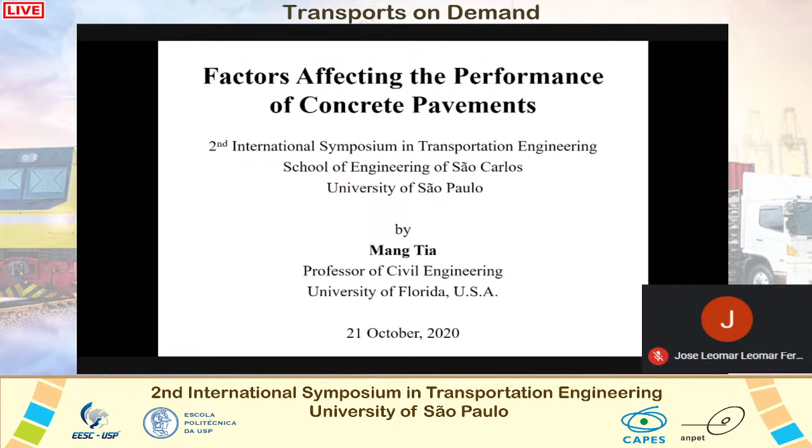Yes. Yeah, thank you very much, Professor Leomar Fernandez. Thank you for inviting me to speak at this prestigious School of Engineering of São Carlos of the University of Sao Paulo. It is indeed a great honor for me to do that. I have not visited your school, but I hope that in the near future, I will have a chance to visit your great School of São Carlos in person.

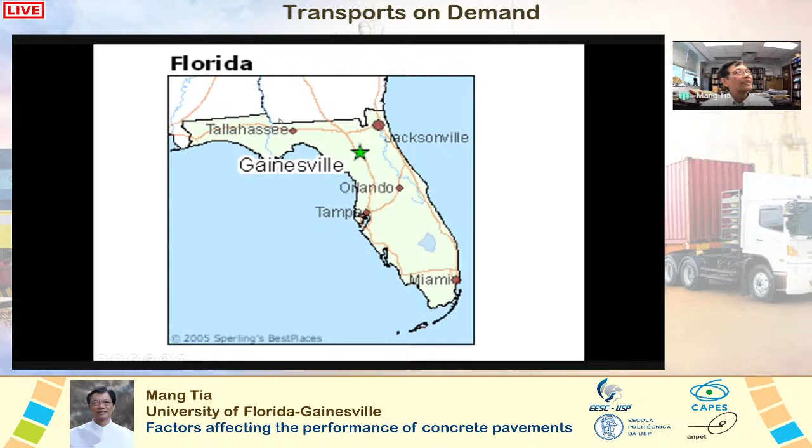I am speaking from the University of Florida, USA. This map shows the location of Florida in the United States. University of Florida is located in Gainesville. This map shows the location of Gainesville, which is marked with a green star in the map here. And on this map, you can also see the location of some famous cities in Florida, including Orlando. That's where you go to Disney World if you come to visit Orlando. There's Tampa, Miami, Jacksonville, and this is our state capital, Tallahassee.

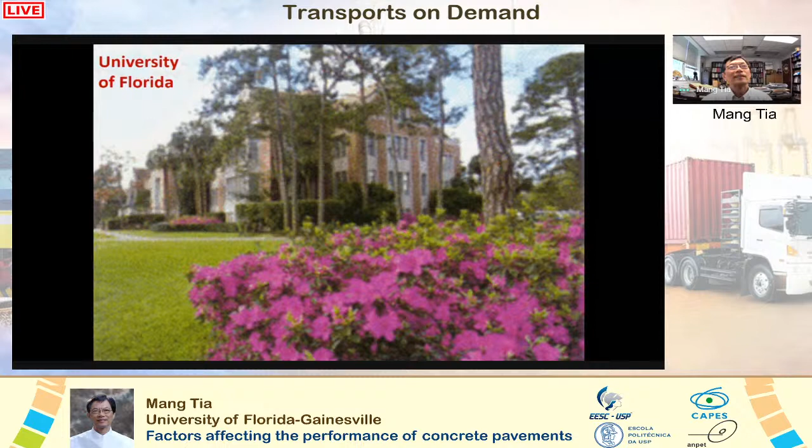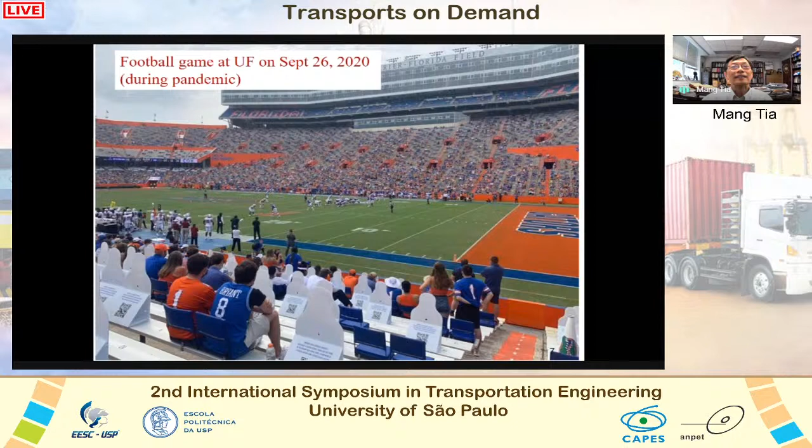Well, recently, about 20 people from the UF football team, including the coach, tested positive for COVID-19, and the football game was canceled last weekend, and it has been suspended indefinitely for now, unfortunately. Well, I'm here to talk about concrete pavements, not football.

Here's a famous concrete pavement in Florida, in northern Florida. It's known as Interstate 10. Interstate 10 is about 4,000 kilometers long, and it starts from the Pacific West Coast in California and runs all the way east to the East Coast in Florida. In Florida, this I-10 section is about 600 kilometers long, and it runs from the Alabama state border on the western end, through the state capital, Tallahassee, and ends at Jacksonville on the east side.

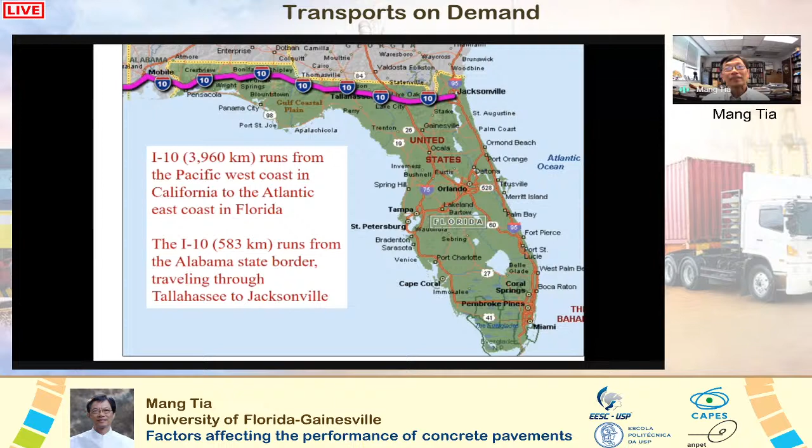And there's also lobbying from the asphalt industry people to build it with asphalt. But finally, a compromise was reached. The western half, from Alabama to Tallahassee, would be built with asphalt, and the eastern half, from Tallahassee to Jacksonville, would be built with concrete. Okay.

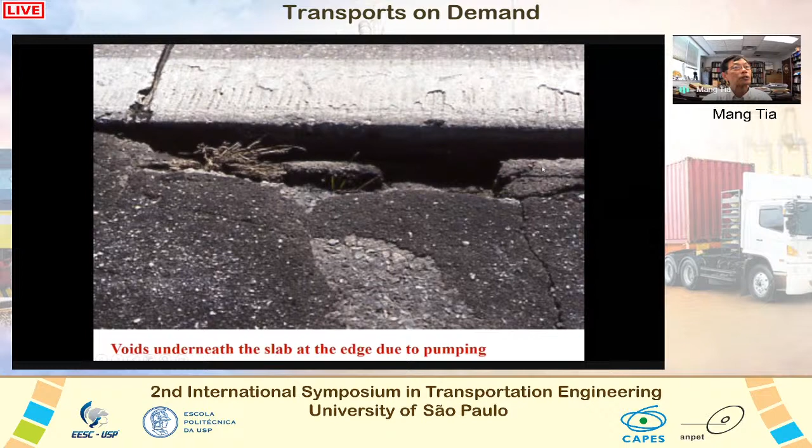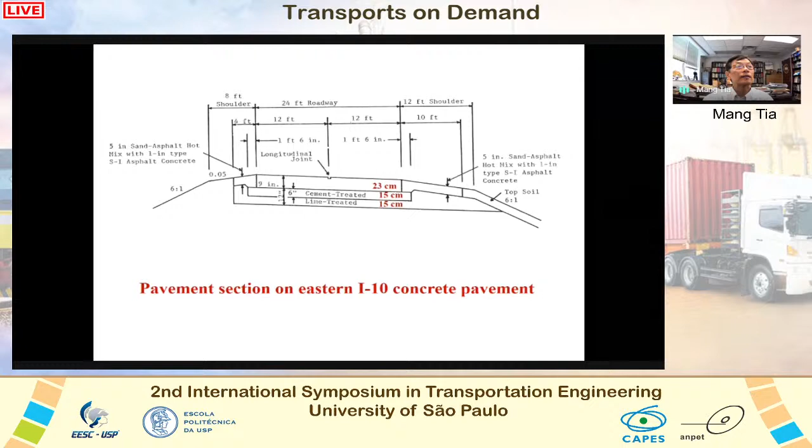Well, because of this observed failure, some modifications were made to the design of the rest of the pavement which had not been constructed. So instead of using 30 centimeter of stabilized subgrade, in the modified design, it's replaced with 15 centimeters of cement treated subbase over 15 centimeter of lime treated subbase. The idea behind this modified design was that this would make the foundation stronger and the subbase would be less erodible. However, this made the situation even worse.

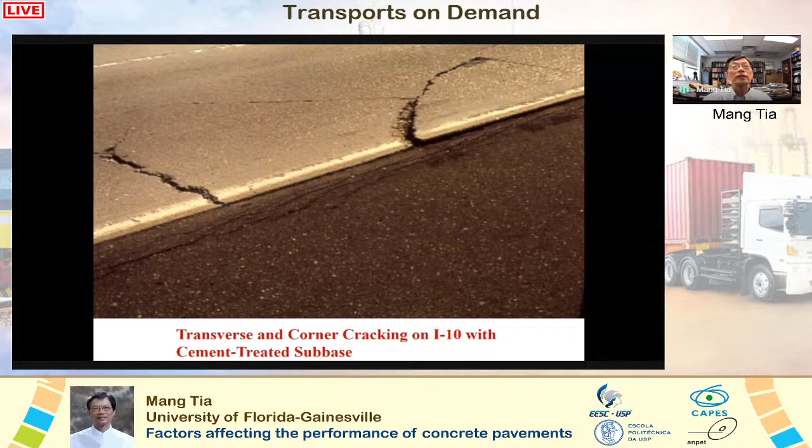There was even more cracking on this pavement with a stronger subbase, as you can see from this picture. The use of the more impervious cement treated subbase had actually worsened the drainage condition of the pavement and thus aggravated the pumping problem even more, as you can see from this picture.

Well, several years later, in 1980, there was construction of another concrete pavement on this I-75, which runs north and south through Florida. Okay, and it goes south all the way to Miami. There was a construction of a 46-kilometer, 6-lane concrete pavement in the county of Sarasota and Manatee, which is south of the city of Tampa, as shown in this map.

Well, because of the problems they have seen on the I-10 concrete pavement, a new design was adopted for this pavement. An even stronger base was used for the concrete slab. The base used was a 15 centimeter Econocrete, as shown here in this drawing. The shoulder lane was also constructed with Econocrete, as shown here. Econocrete is concrete with relatively lower strength than normal concrete, but it's much stronger than the cement-treated subbase.

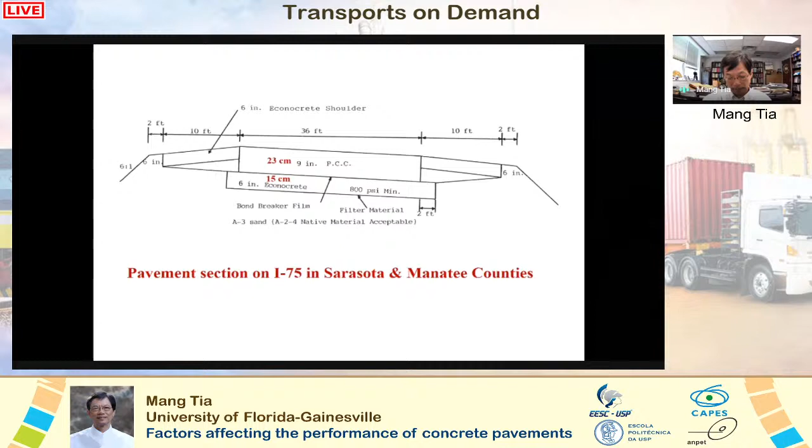It also used an innovative design of skew joints. Skew joints are joints that are not at right angle to the longitudinal direction. And it also used variable joint spacing. The slabs are of different lengths, and spacings of 16, 17, 22, and 23 feet are used. Okay, this corresponds to 4.9, 5.2, 6.7, and 7.0 meters.

The rationale behind the use of skew joint was that when trucks' wheels pass over the joints, only one wheel would pass over the joint at one time, and thus the impact effect would be lessened. And the rationale behind the use of variable joint spacing was that this would lessen the resonance effect. If the slabs are of different lengths, if they were to vibrate, they would vibrate at different frequencies, and thus the chance of all the slabs vibrating at the same resonance frequency would not happen.

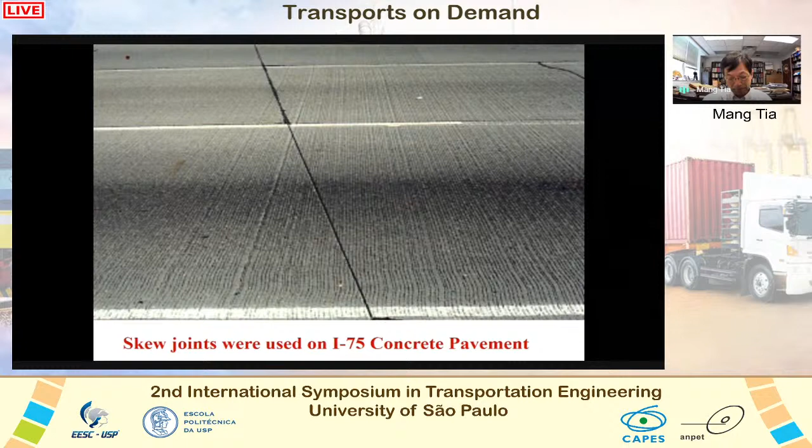The Econocrete shoulders were tied to the concrete slabs with tie bars, and it was indeed what we can call a Cadillac design. Cadillac is a very expensive car, so this is an expensive design. It was a Cadillac design which should never fail. And it was like the Titanic ship, which should never sink. But just like the Titanic sank, this pavement failed miserably.

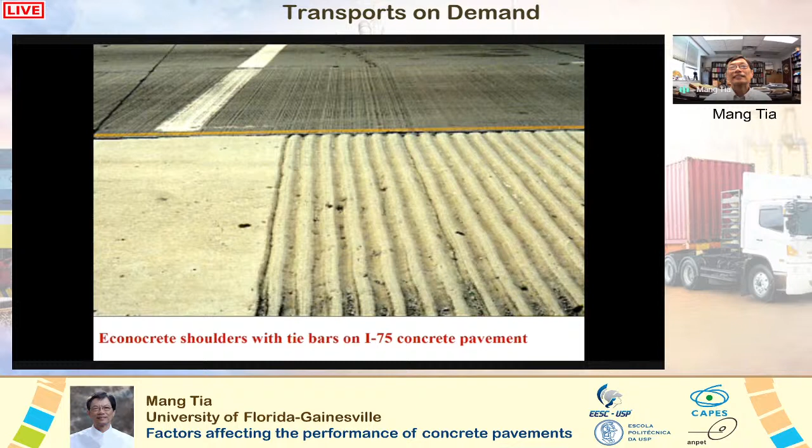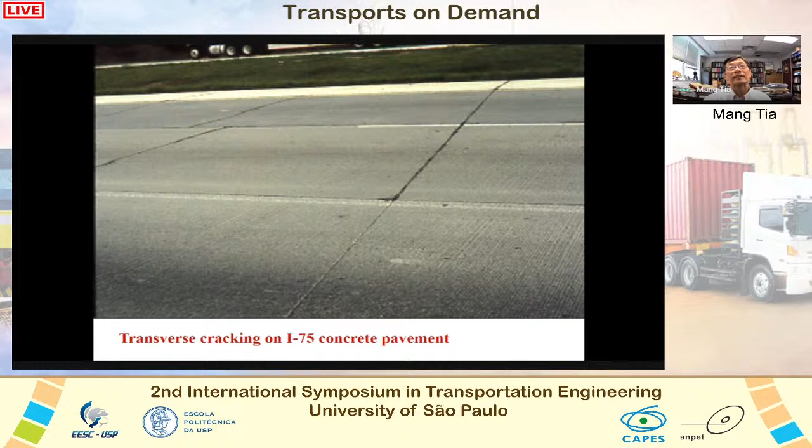Soon after the highway was opened to traffic, transverse cracking was observed, especially on the longer slabs. Later on, when structural analysis was performed to evaluate the effects of skew joint, it was found that the use of skew joint didn't really help. It actually increased the maximum stresses due to the acute angles of the slabs at their corners. And also pumping was observed from the supposedly non-erodible Econocrete base.

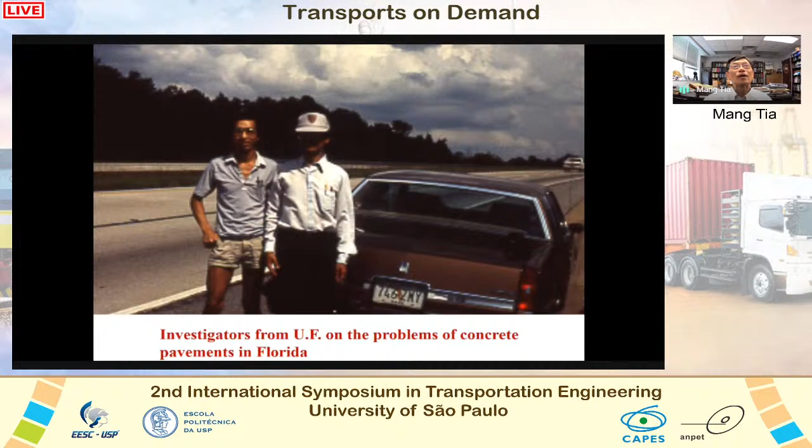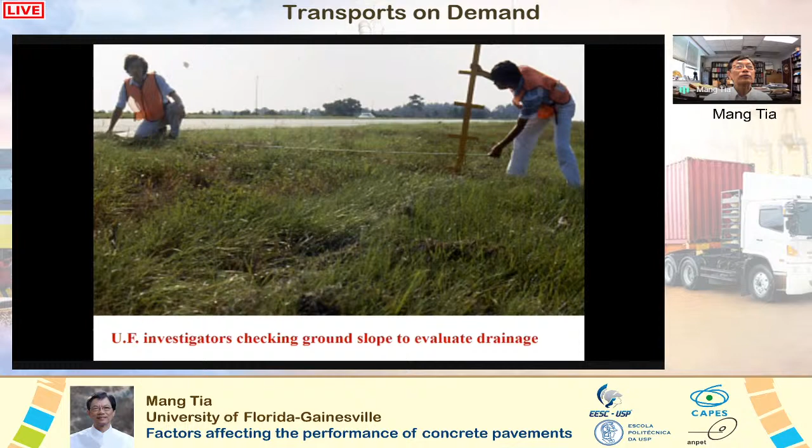We as university researchers had the opportunity to investigate the problems of these pavements. And I was the person wearing a white cap here in this picture. So we worked together with the engineers from the Florida Department of Transportation to investigate the causes of problems, checking for dowel bars with metal detector, checking ground slope to evaluate drainage condition of the pavements, performing falling weight deflectometer tests to evaluate the response of the pavement under various conditions. Thermocouples were used to monitor temperature variations within the concrete slabs.

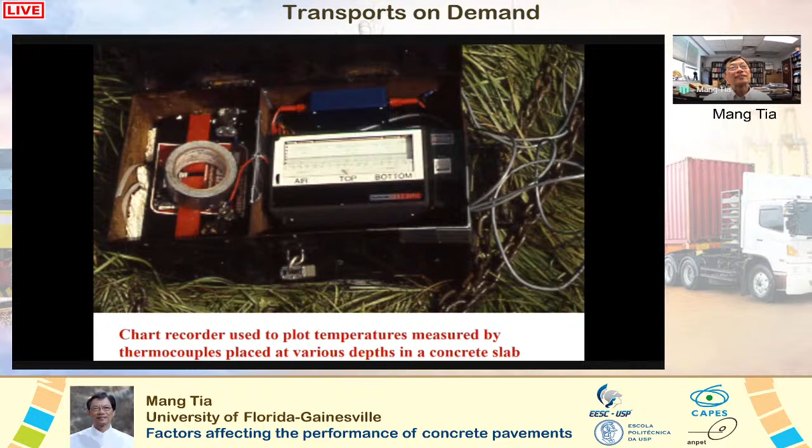In those days, a chart recorder was used to record and plot temperatures measured by thermocouples, which were placed at various depths in the concrete slabs. These are a few typical temperature distributions in a concrete slab at different times in the daytime. In the daytime, the temperature of the concrete was higher at the top than at the bottom, as you can see from these plots.

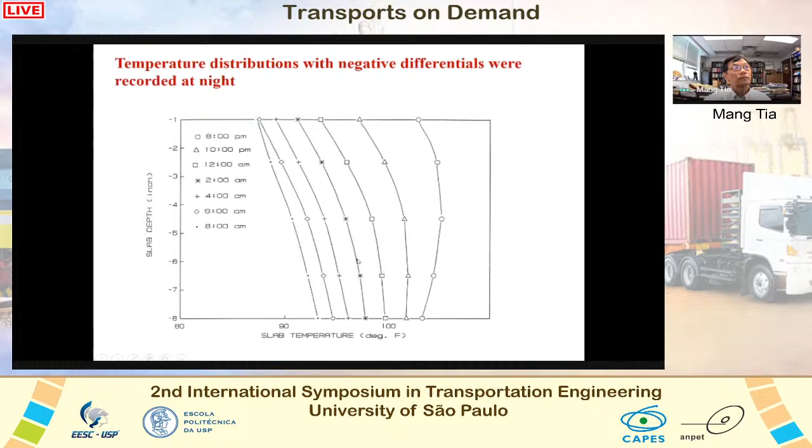At night, it's the other way around. At night, the temperature is lower at the top than at the bottom. And this shows temperature distributions at different times at night.

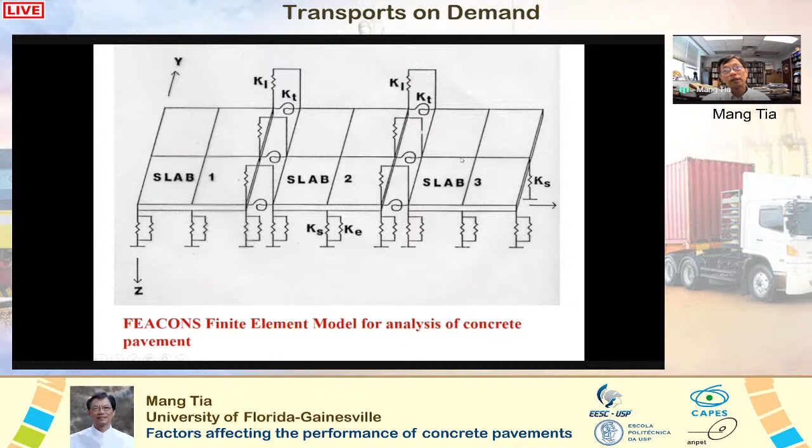To help with our evaluation, we developed a finite element model called FEACONS for analysis of concrete pavement under the combined effects of loads and temperature differentials in the concrete slab. It also had the capability to model the effects of joints and edges, and also model the behavior of concrete slabs, which is either bonded or not bonded to the base layer. So with this finite element model, we are able to do a lot of analysis.

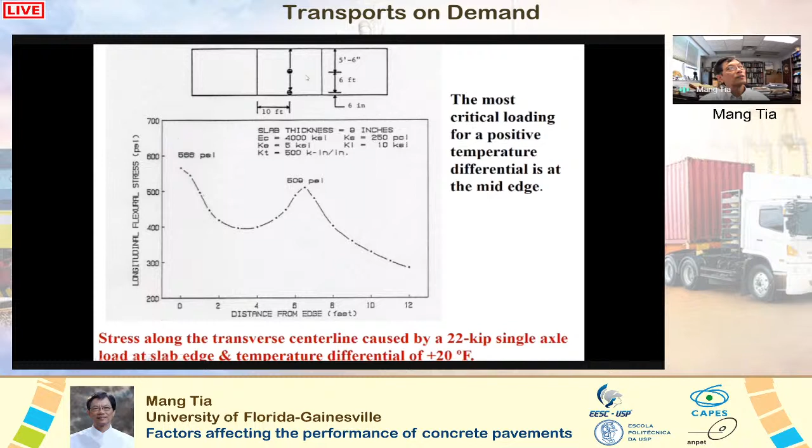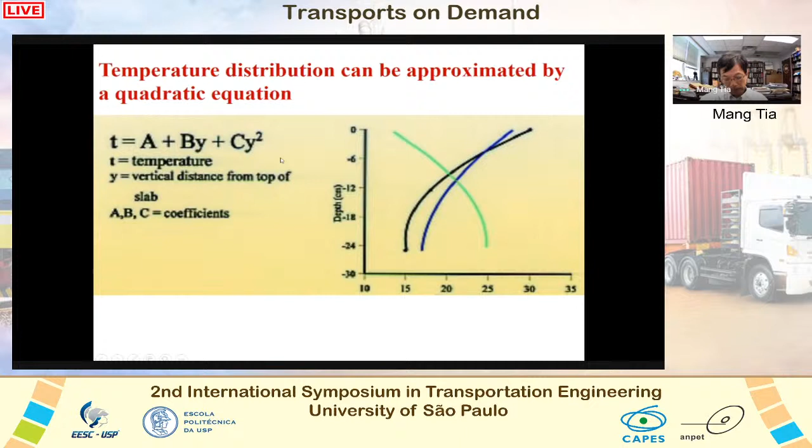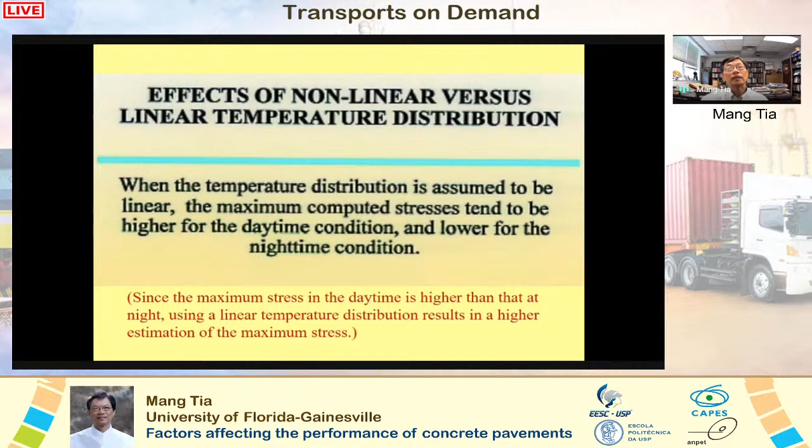Well, when the temperature distribution is assumed to be linear, the calculated maximum stress tends to be higher for the daytime condition and lower for the nighttime condition. The maximum stress in the daytime condition is usually higher than that at night. And thus, if we use a linear temperature distribution, we will get a higher estimation, which is a more conservative estimation of the maximum stresses. So it's okay to use a linear approximation, because in that way we'll get a more conservative estimate of the maximum stress.

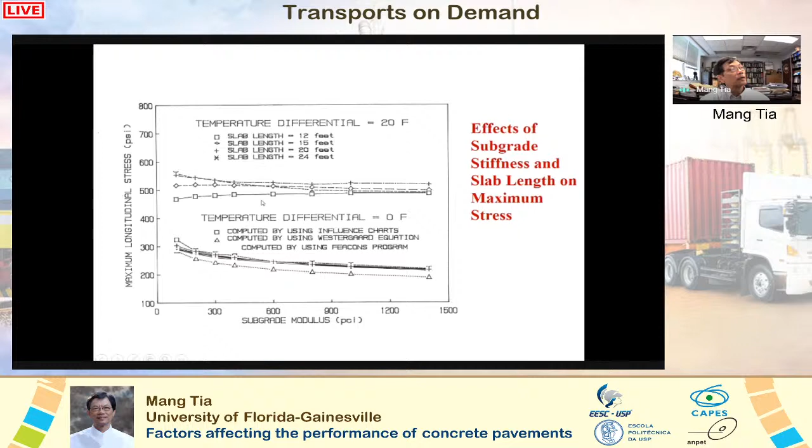But when temperature differential is considered, the stresses are much higher, but also the subgrade stiffness has less of an effect if temperature differential is considered in the analysis.

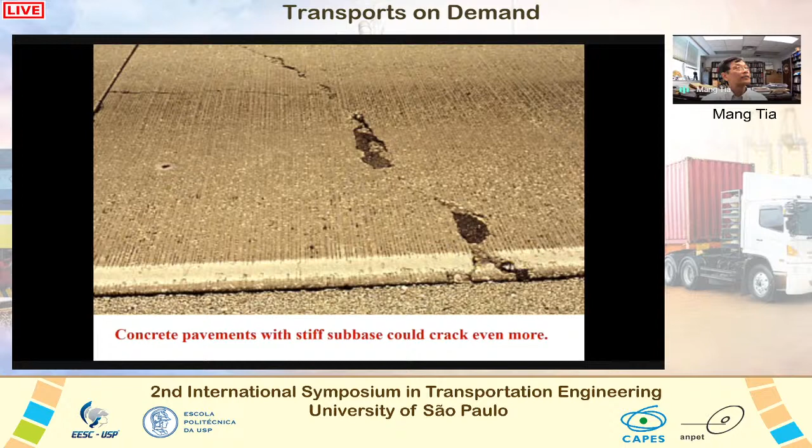So using a stiff subbase would not help in reducing cracking in the pavement slabs. Here's an example of a cracked slab on a pavement with a stiff subbase. And concrete pavement with stiff subbase could crack even more, as we have seen from our observation.

So we can summarize by saying that when the effects of thermal gradients are considered, the effects of subgrade stiffness has very little effect on the maximum stresses in the concrete slab. The use of a stiff subgrade or subbase may not necessarily improve the performance of a concrete pavement.

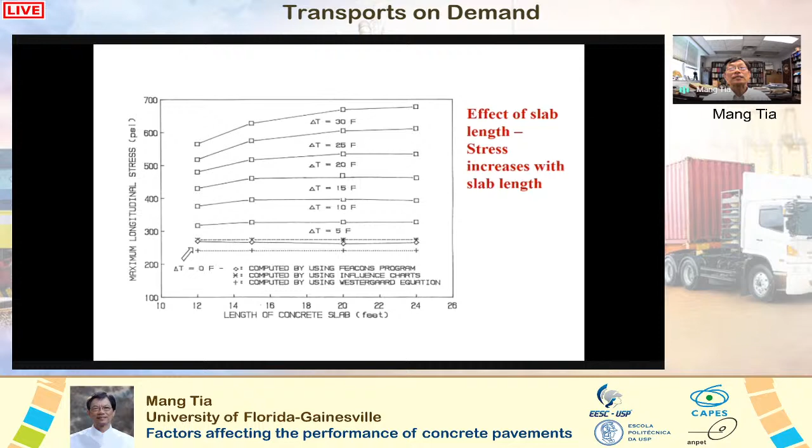When temperature differential in a concrete slab is not considered in the stress analysis, slab length has no effect on the maximum stresses. However, when there is a temperature differential in the concrete slab, the slab length could have significant effect on the maximum stresses. These are plots of maximum stress in a concrete pavement as a function of slab length for different temperature differentials. As you can see from these plots, when there is a temperature differential in the concrete slab, the maximum stress increases as the slab length increases.

Thus, we can summarize by saying that when thermal gradients exist in a concrete slab, the maximum stresses increase with increasing slab length. And this conclusion was validated by our observation of cracking in the concrete pavement on I-75 in Sarasota and Manatee counties. The slabs of longer lengths of 6.7 meter and 7.0 meter cracked more than the shorter slabs of lengths of 4.9 and 5.2 meter.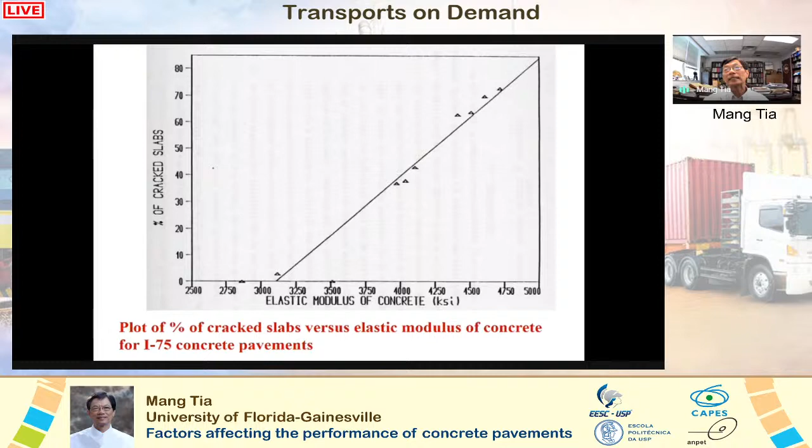The maximum stress is affected by the elastic modulus of the concrete, as shown in the previous slide, and the data obtained from I-75 concrete pavement in Sarasota and Manatee counties show that the concrete with higher elastic modulus show higher percent of cracked slab. These are data from our field observation. When we plotted elastic modulus of the concrete versus the percent cracked slab, it shows that the concrete with higher elastic modulus actually cracked more.

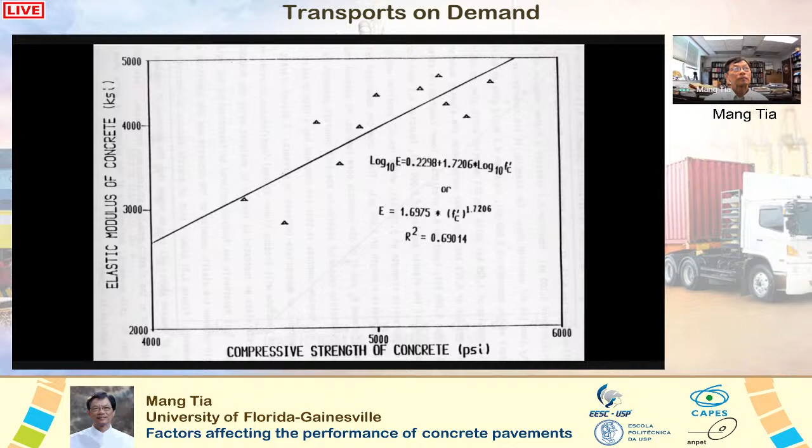Usually, concrete with higher strength is accompanied by higher elastic modulus, as shown in this plot of elastic modulus versus compressive strength of concrete. Thus, using a stronger concrete may not necessarily give us better performance, as the performance of the concrete pavement is also affected by the elastic modulus and coefficient of thermal expansion of the concrete as well. We can say that maximum temperature load induced stresses increase as the concrete modulus and coefficient of thermal expansion increase.

To evaluate the potential performance of a concrete pavement, we can compare the maximum stress with the flexural strength of the concrete. A concrete giving a lower maximum stress to flexural strength ratio would be less likely to crack and would give a better performance.

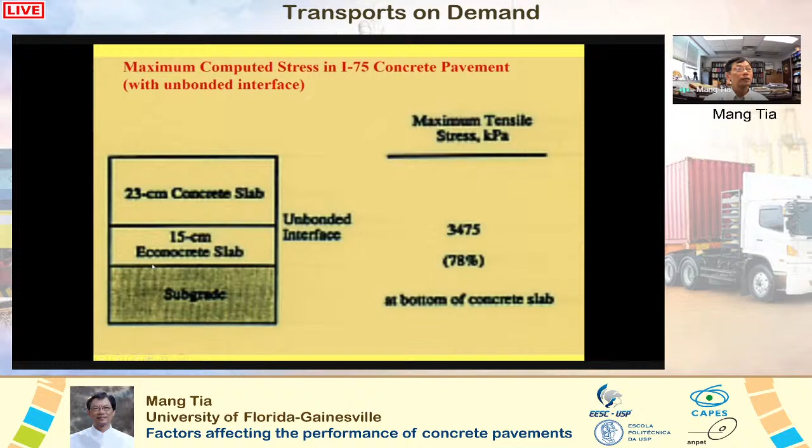The design of the I-75 concrete pavement in Sarasota and Manatee counties is shown on the left here. It had 23 centimeter of concrete over 15 centimeter of Econocrete base, and there was no bonding between the concrete and the Econocrete base. Critical stress analysis using a 22 kip axle load and a temperature differential of plus 20 degree Fahrenheit in the concrete slab gave a maximum stress at the bottom of the concrete slab, and the stress was equal to about 78% of the flexural strength of the concrete.

If the concrete slab were bonded to the Econocrete layer, the concrete and the Econocrete layer would act as one thick slab, and under the same load and temperature differential, the computed maximum stress would occur at the bottom of the Econocrete layer, and that maximum stress would be equal to only 67% of the flexural strength of the Econocrete. Unfortunately, the concrete slab was not bonded to the Econocrete base in that concrete pavement. If they had been bonded together, this pavement could have much better performance according to our prediction.

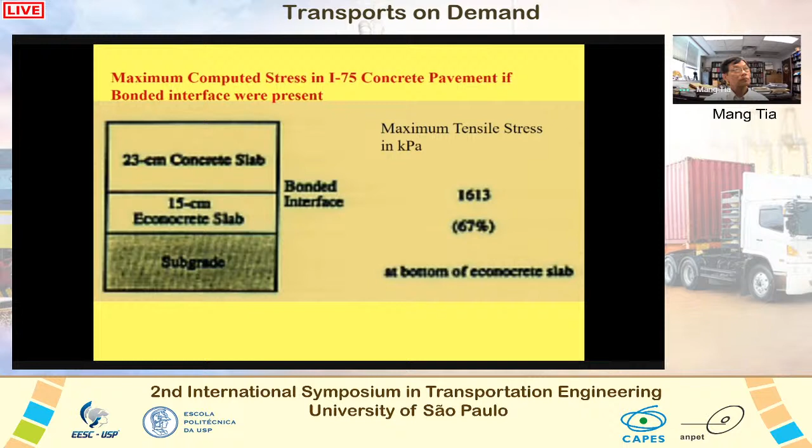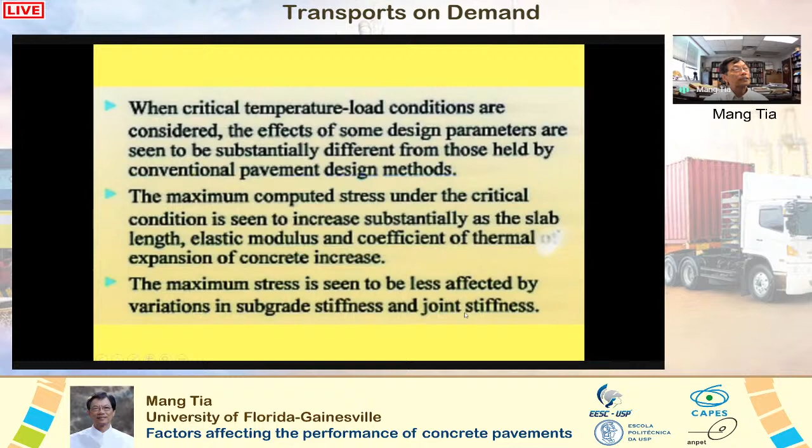We can make the following summarizing statements from our study. When critical temperature load conditions are considered, the effects of some design parameters are seen to be substantially different from those held by conventional pavement design methods. The maximum computed stress under the critical condition is seen to increase substantially as the slab length, elastic modulus, and coefficient of thermal expansion of concrete increase. The maximum stress is seen to be less affected by variation in subgrade stiffness and joint stiffness. A composite pavement with a bonded interface is seen to have a much lower maximum stress than that with an unbonded interface.

Using a wider slab that extends some distance into the shoulder lane can reduce the maximum stress in the slab substantially. Using a thicker slab is the most effective way to reduce the maximum stress. And as most people already know, good subdrainage is essential to ensure good pavement performance.

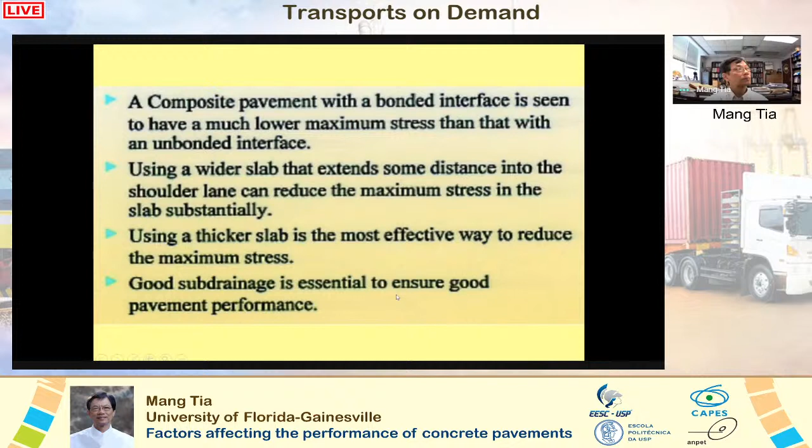This is a typical design used by the more recently built concrete pavements in Florida. It has a thick concrete slab with a thickness of 33 centimeters. The concrete extends 2 feet, which is equal to 61 centimeters, into the shoulder lane in order to reduce the maximum stress on the concrete slab.

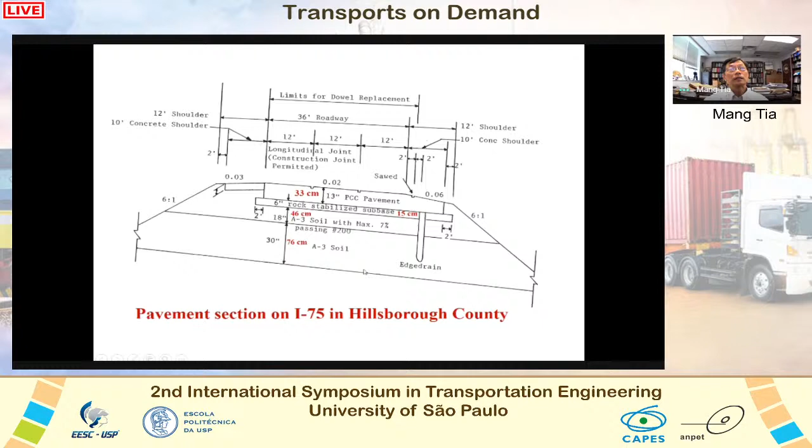The new design uses sub-base materials which have good drainage characteristics. The new design also incorporates edge drains from here to drain off the water which may get under the concrete slab. Okay, and so from all the lessons we've learned, the design used now is much better.

Next, I want to share the result of a recent study on the evaluation of concrete pavement life expectancies in Florida. First, a little bit on the background and objective of this study. In Florida, the initial design for new construction for both asphalt and concrete pavements is 20 years, while the rehabilitation period of asphalt varies from 8 to 20 years. That of concrete pavements varies from 20 to 25 years.

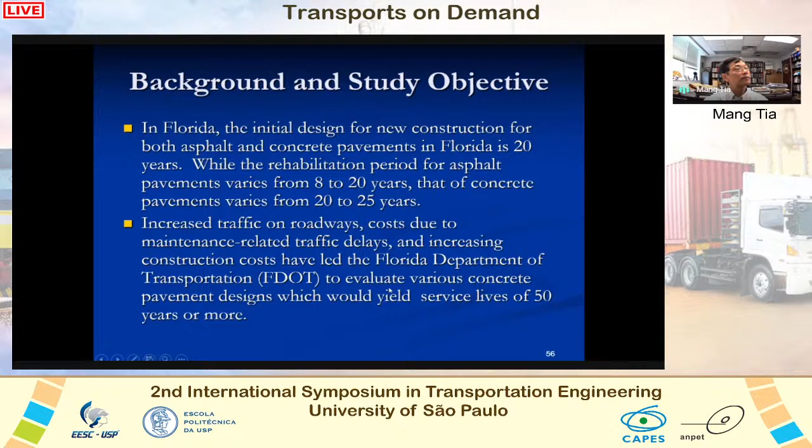Increased traffic on roadways, costs due to maintenance-related traffic delays and increasing construction costs have led the Florida Department of Transportation to evaluate various concrete pavement designs which would yield service lives of 50 years or more. And I would like to present 4 of the main tasks in this study. I won't read them as I will present them one by one as we go along.

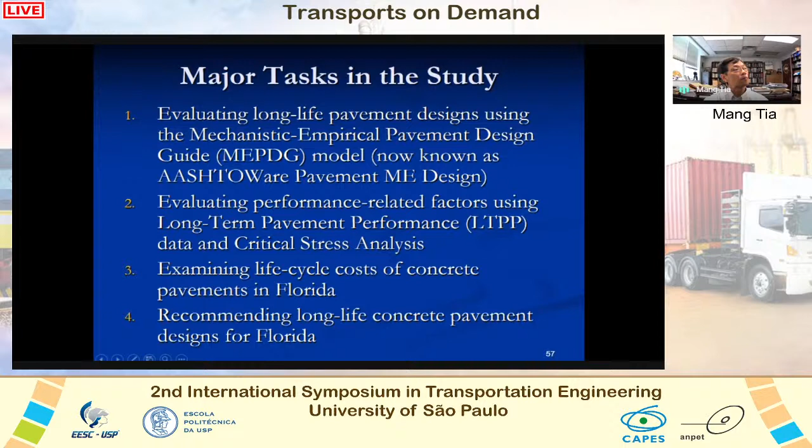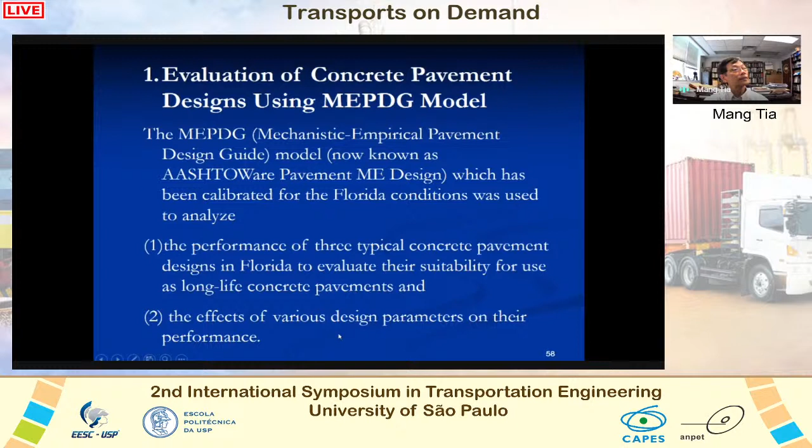In the first main task, the MEPDG, which is the Mechanistic Empirical Pavement Design Guide model, now known as the AASHTOWare Pavement ME Design, had been calibrated for the Florida condition. This model was used to analyze, number one, the performance of 3 typical concrete pavement designs in Florida, to evaluate their suitability for use as long-life concrete pavement, and number two, we also evaluate the effects of various design parameters on their performance.

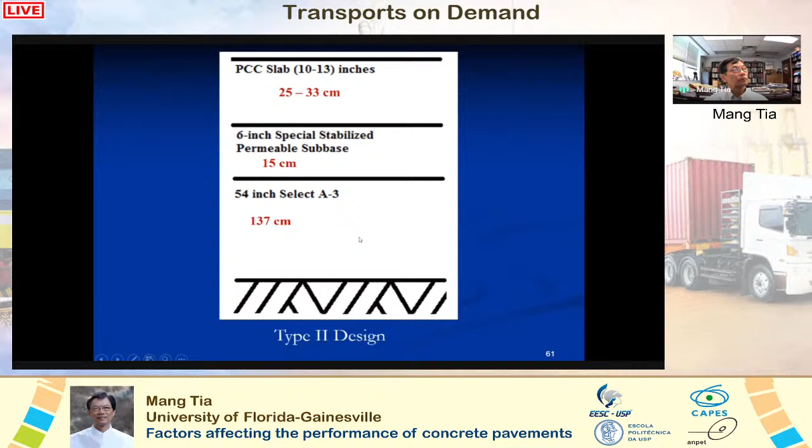Okay, so these 3 concrete pavement designs were evaluated using the MEPDG model, which, as I mentioned earlier, has been calibrated for Florida conditions. The design life of the concrete pavements to be analyzed by the MEPDG model was set to be 50 years. The outputs of the MEPDG analysis give the predicted performance of the pavements in terms of International Roughness Index, IRI, joint faulting, and transverse cracking over the design period. If one or more of the predicted distresses at the end of the design period exceed the acceptable threshold values, the analyzed pavements would be considered to have failed for the design period.

The input threshold values used are given here. Okay, and we need to have an initial IRI, and the initial IRI was set to be 58 inches per mile. This is the threshold value without consideration of reliability level. So we assign a reliability of 95%. When the reliability is set to be 95%, these threshold values are now much lower. So at the end of the design life, if the predicted distress is higher than these threshold values, we would consider that the design is not adequate.

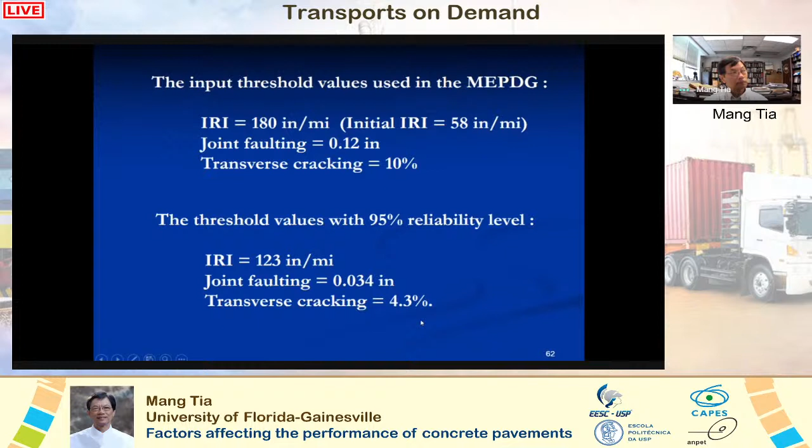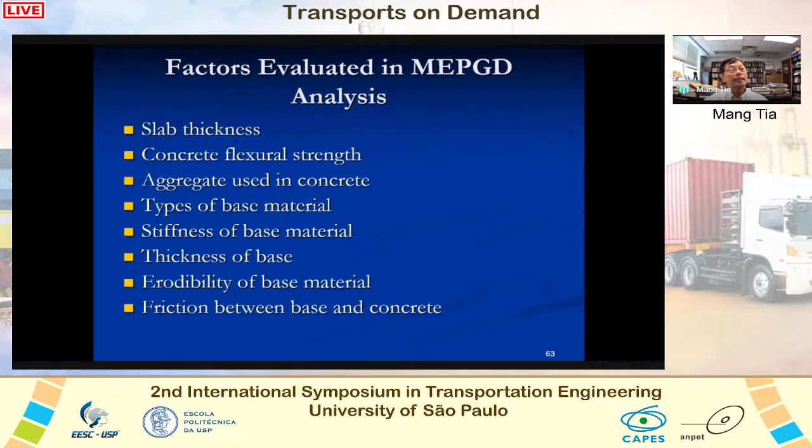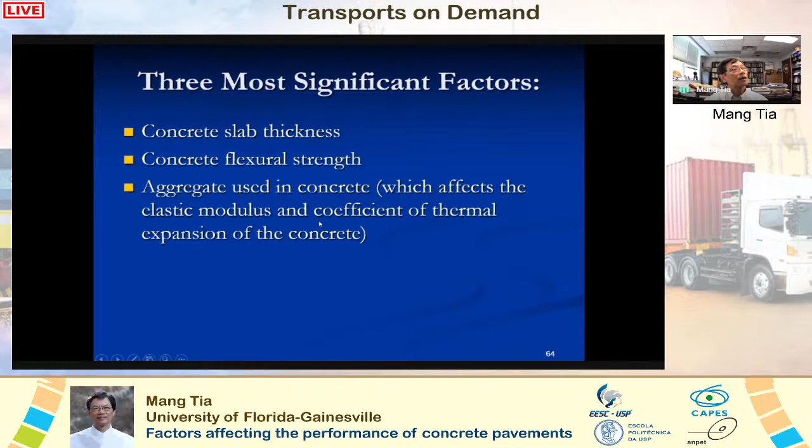The factors evaluated in our analysis include slab thickness, concrete flexural strength, aggregate used in the concrete, types of base material, stiffness of base material, thickness of base, erodibility of base material, and also friction between base and the concrete. And what we found is that out of all these factors, the 3 most significant factors were: 1, the concrete slab thickness, 2, concrete flexural strength, and 3, the aggregate used in the concrete, which affects the elastic modulus and coefficient of thermal expansion of the concrete.

3 typical concretes used in Florida, made with 3 different aggregates, were used in this analysis. These 3 aggregates were: Brooksville limestone, which is a porous limestone in Florida, Calera limestone, which is a dense limestone, and river gravel.

A flexural strength of concrete of 650 psi, which is equal to 4.5 megapascal, was used in the analysis.

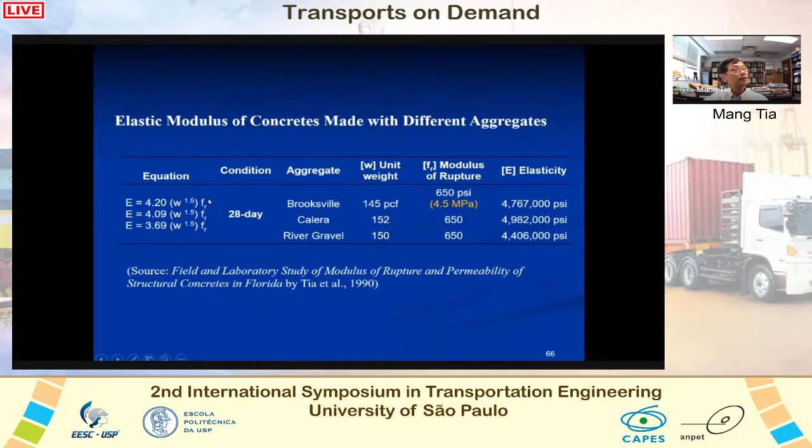In a previous study by UF, the elastic modulus of Florida concrete was related to the flexural strength, unit weight, and type of aggregate used by various regression equations. We see here the regression equations which relate the density and the flexural strength to the elastic modulus.

The developed equations, as shown here, were used in determining the elastic modulus of these three concretes used in the analysis. This table shows the calculated elastic modulus of these three concretes with a flexural strength of 650 psi. So basically, when the flexural strength changes, the elastic modulus would change accordingly, and we use these equations to estimate the elastic modulus at different levels of flexural strength.

This table shows the results of the MEPDG analysis. There's a lot of information here, and what I want to point out is that it shows the terminal distresses, and up here it shows the required thickness in order to meet all the criteria. Let me try to explain it a little bit more.

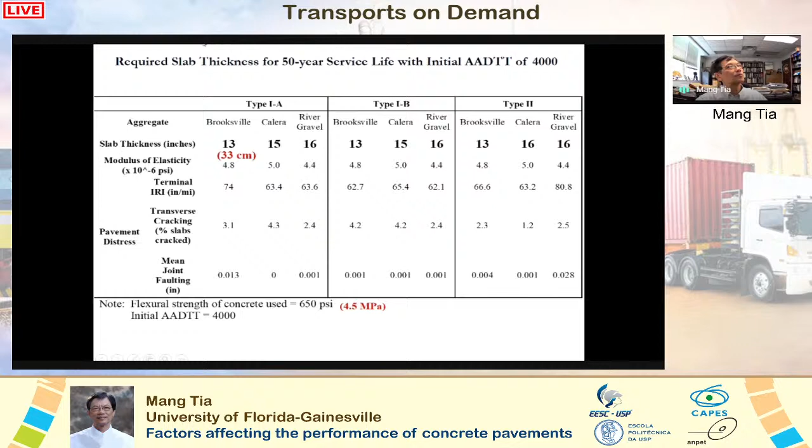The key thing here is to use the right aggregate. It's not the strength, it's the aggregate. If you use the right aggregate, you can have the same strength, but the concrete is going to perform much better because of the right kind of aggregate you use, since the concrete has a lower coefficient of thermal expansion. So there's a big difference between 13 inches versus 16 inches.

So now the rest of the analysis is going to be done using this good aggregate. We want to see if we can really design a concrete pavement that can last for at least 50 years, and let's do it with this good aggregate.

Now we try to look at the effect of flexural strength. Analysis made with this concrete using this good aggregate, and we vary the modulus of rupture from 600 psi to 700 psi to 800 psi, and we want to see if increasing the modulus of rupture, which is the flexural strength, makes a difference. And the answer is yes.

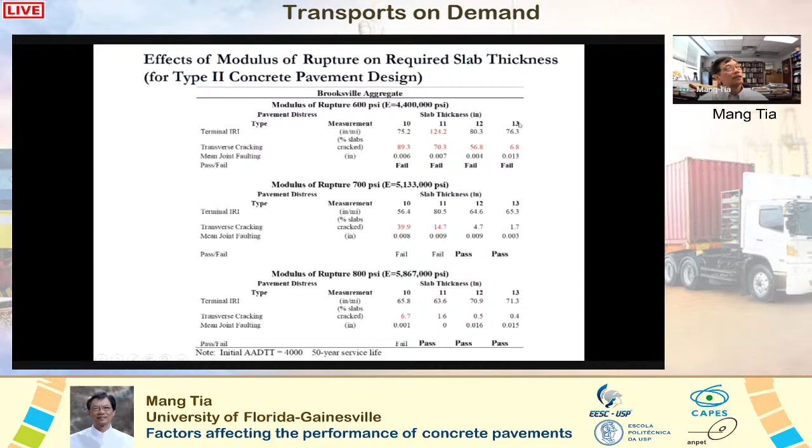When you increase the flexural strength, as you can see here, when the flexural strength is 600, it all fails. When we see a red number here, it means it failed. All of them fail for a thickness of 13 inches. But if we increase the flexural strength to 700 psi, then we only need 12 inches, and it would last for 50 years. If we go up to 800 psi, we only need 11 inches.

Let me repeat this: if you use the same concrete made with the same aggregate, if you increase the flexural strength, the performance would be better.

Okay, well, the previous analysis was done using an average daily truck traffic of 4,000, which is relatively low traffic volume. Well, can we design pavements with extremely high traffic, and can it last for 50 years? So that's what we did next. So we use an extremely high daily truck traffic volume of 17,000. So basically, 17,000 trucks pass through the pavement in a day.

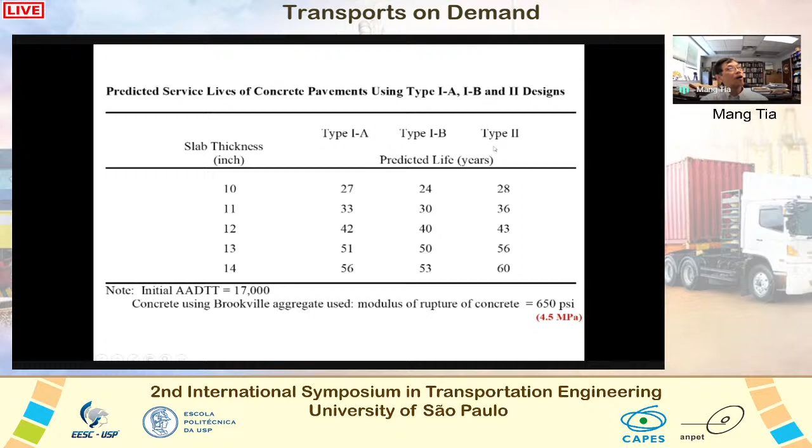Okay? And we use this best aggregate for our concrete. And so we ran the analysis to see how long it would last if we have different thicknesses, and here are the different thicknesses. This shows the expected life. You can see that we use this good concrete made with this good aggregate. It can be done if the thickness is 13 inches. So here, at 13 inches, the life expectancy is over 50 years for all three designs, and the type 2 is relatively better than the other two. But all of them would work.

Okay, so the key thing is you need to have enough thickness, and you need to have the right concrete, not just strength. In the past we always thought about strength, make it stronger, but you need to have the right aggregate, otherwise it won't work. Okay, we have the right aggregate, and of course you need adequate strength. In this analysis, we use a flexural strength of 650 psi, which is equal to 4.5 megapascal. Then it would last for at least 50 years.

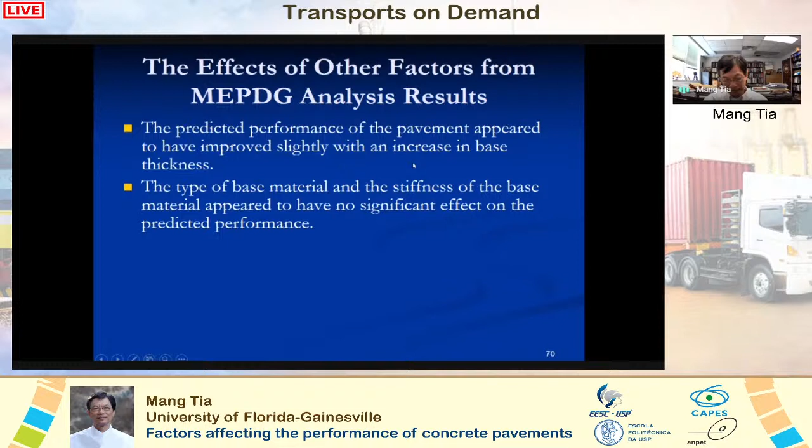Okay, and so we can make these conclusions: the predicted performance of the pavement appears to have improved slightly with an increase in base thickness. The type of base material and stiffness of the base material appear to have no significant effect on the predicted performance. And also using different erodibility factor and friction factor for the base material appear to have no significant effect on the predicted performance according to the results of our MEPDG analysis.

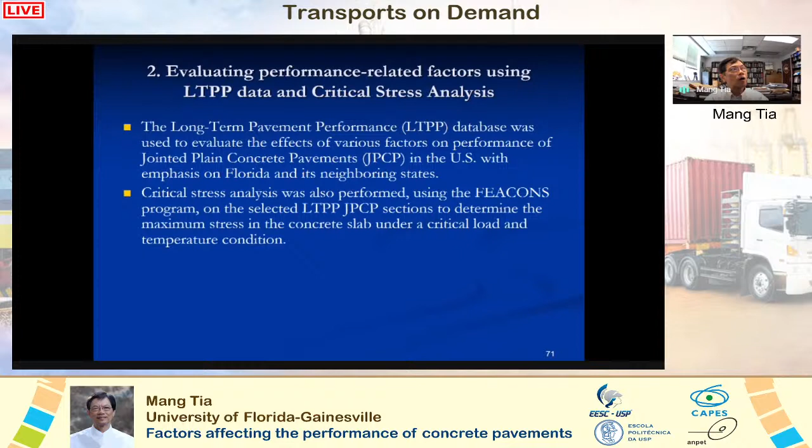And we also did critical stress analysis using the FEACONS program on the selected JPCP, jointed plain concrete pavement sections. And we use this critical stress analysis to determine the maximum stress in the concrete slabs under critical load and temperature condition. The maximum computed critical stress for each condition was divided by the modulus of rupture of the concrete to determine the stress to strength ratio.

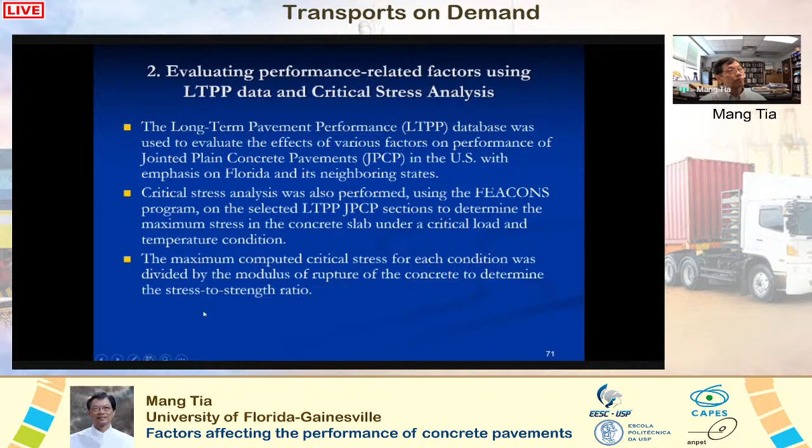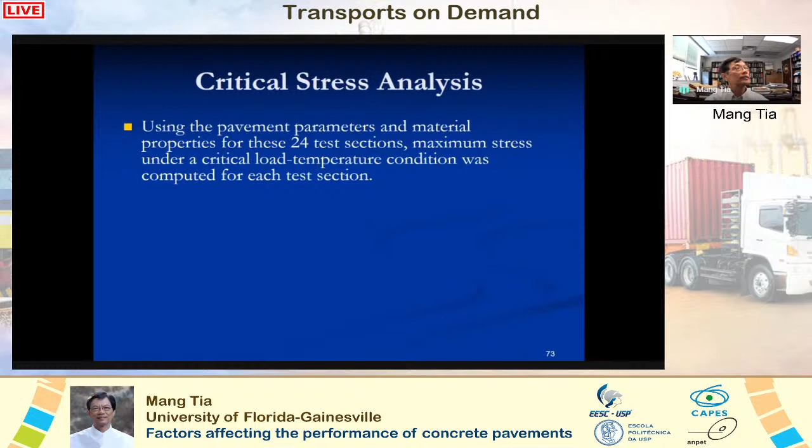Okay, in the critical stress analysis, using the pavement parameters and material properties for these 24 test sections, maximum stress under critical load-temperature condition was computed for each test section. The maximum stress caused by a 22 kip axle load applied at the middle of the edge of the concrete slab, when there was a temperature differential of 20 degrees F between the top and the bottom of the concrete slab, was computed. This represented a critical loading condition as reported by previous studies for Florida DOT. And the FEACONS computer program was used for the stress analysis.

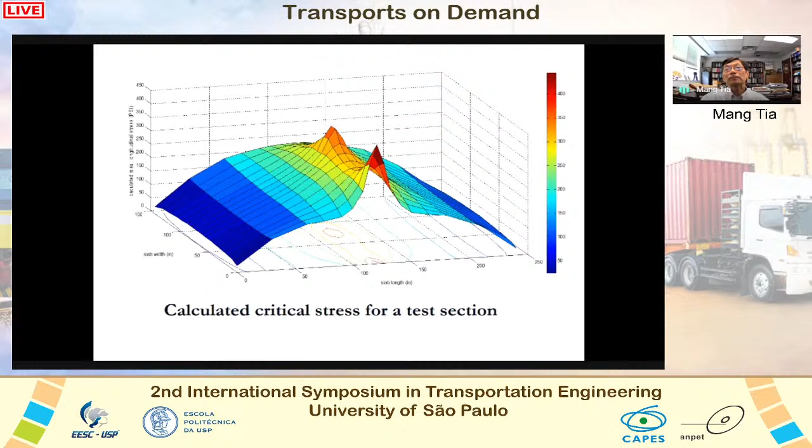So a higher IRI deterioration rate represents worse performance. This is a plot of the computed maximum stress versus IRI deterioration rate. A higher computed maximum stress is related to a higher IRI deterioration rate. However, the correlation is not very good, as seen from this low R square value.

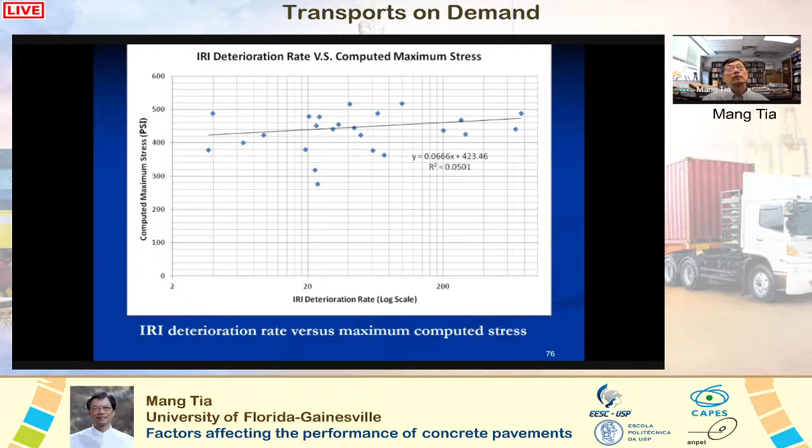When we divided the maximum stress by the flexural strength of the concrete to obtain the stress to strength ratio and plotted stress to strength ratio against IRI deterioration rate, we got a better relationship with a slightly higher R square value. So as the stress to strength ratio increases, the IRI deterioration rate also increases.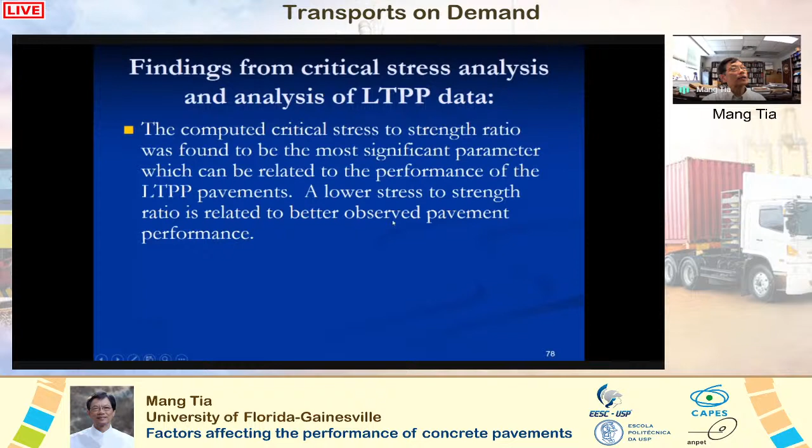Findings from the critical stress analysis are summarized as follows. The computed critical stress to strength ratio was found to be the most significant parameter which can be related to the performance of the LTPP pavements. A lower stress to strength ratio is related to better observed pavement performance. The better performing pavements were noted to have a computed stress to strength ratio of less than 0.7.

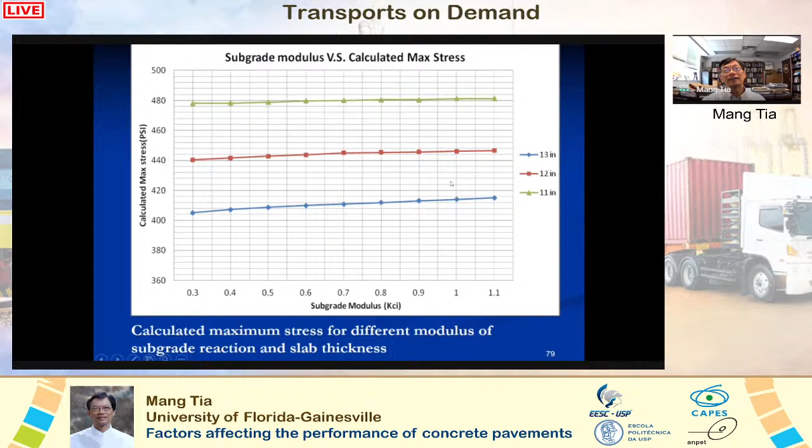This figure shows plots of maximum stress versus modulus of subgrade reaction for different slab thickness from the critical stress analysis. It can be seen that when the slab thickness is 11 inch or higher, increasing the subgrade modulus actually increases the maximum stress in the concrete slab when we calculate the stress using the critical loading condition.

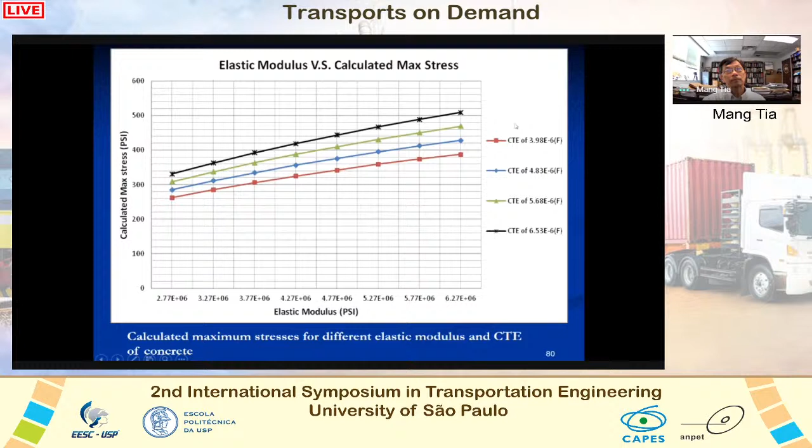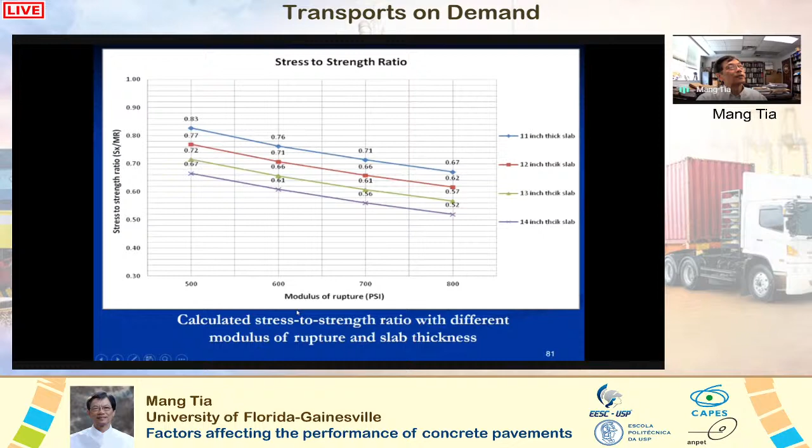And so from the plot, it can be seen that we have a concrete made with the same aggregate. Increasing the modulus of rupture of the concrete will reduce the stress to strength ratio and thus improve the performance of the concrete pavement. Didn't we already conclude that? Well, we concluded that from the MEPDG analysis. Now we conclude it from the critical stress analysis.

Here's a summary of the findings from the critical stress analysis. The most significant factors affecting stress to strength ratio are the concrete slab thickness and the concrete properties, which include the elastic modulus, modulus of rupture, and coefficient of thermal expansion. Variations in the base and sub-base properties were found to have minimal effects on the stress to strength ratio for concrete slab thickness of 11 inches or higher. These observed results agree well with the findings from the MEPDG analysis.

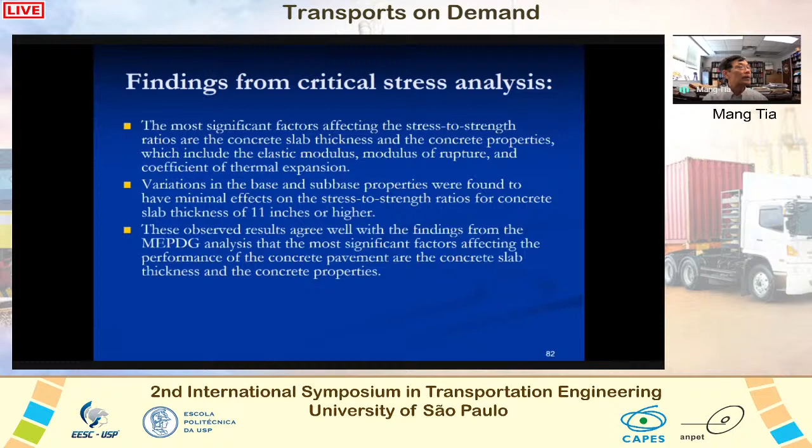These findings show that the most significant factors affecting performance of the concrete pavements are the concrete slab thickness and the concrete properties. And similar to the results of the MEPDG analysis, when the same aggregate is used in the concrete, increasing the flexural strength of the concrete will result in better predicted pavement performance.

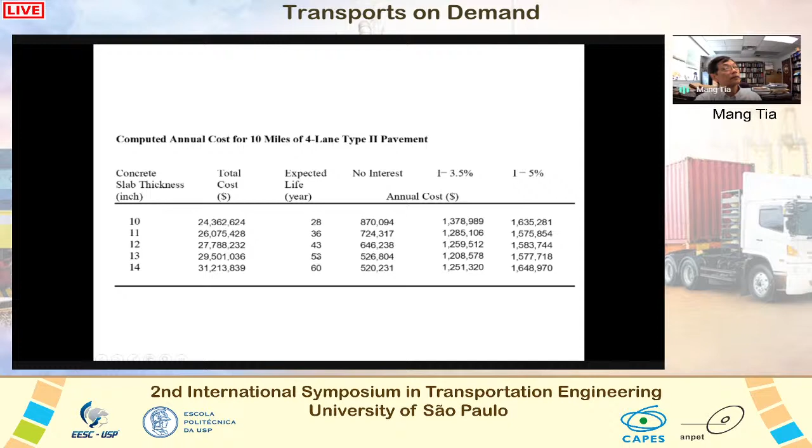The best design would be if we use 13 inches, it will give us an expected life of more than 50 years. Well, if we compare between these three types of design, type 2 is better than the other two. But all of them can give us a life expectancy of over 50 years.

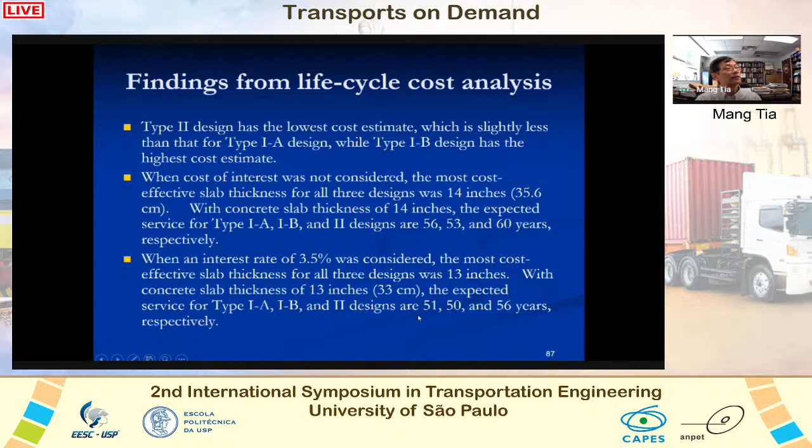Okay, we can summarize the findings here. Type 2 design has the lowest cost estimate, and when cost of interest was not considered, we can use much thicker slabs. But if we have an interest rate of 3.5%, then we can go with 13 inches, which is equal to 33 centimeters, and the expected life would be 51, 50, or 56 years, depending on the design. Okay, so design 2 is the best.

Okay, so here's our recommendation to Florida DOT. The 3 typical Florida concrete pavement designs evaluated in this study can be used as long life pavements if the slab thickness is adequate and the concrete has low elastic modulus, low coefficient of thermal expansion, and adequate flexural strength. So the key thing is not just flexural strength, but we need to have low elastic modulus and low coefficient of thermal expansion. If you just put in any type of concrete with enough strength, it may not work.

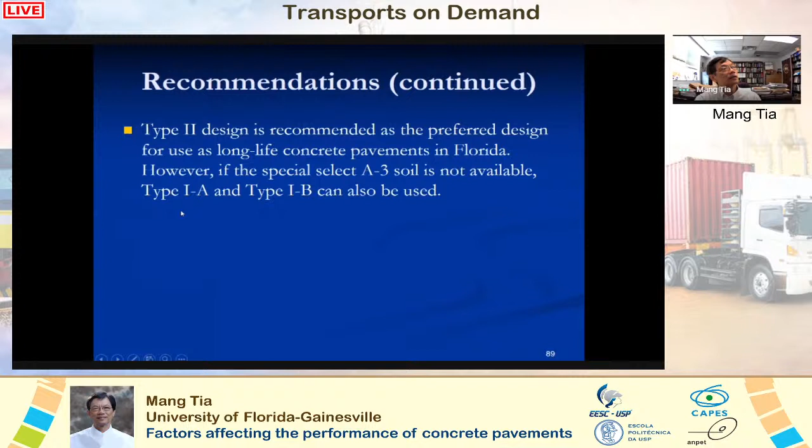Among the 3 designs, type 2 is the best, in terms of longest expected life and the lowest cost. And so we recommend that, if possible, use type 2 design for long life concrete pavements in Florida. But this requires the use of A3 soil, which is a good soil, permeable, with good strength. But if it's not available, we can go with type 1A or type 1B as well.

Okay, so the key thing is to have enough thickness. If we want it to last for 50 years with heavy traffic, you need at least 13 inches. Better yet, if we have 14 inches. Okay, 13 inches would be equivalent to 33 centimeters, and 14 inches equal to 35.6 centimeters.

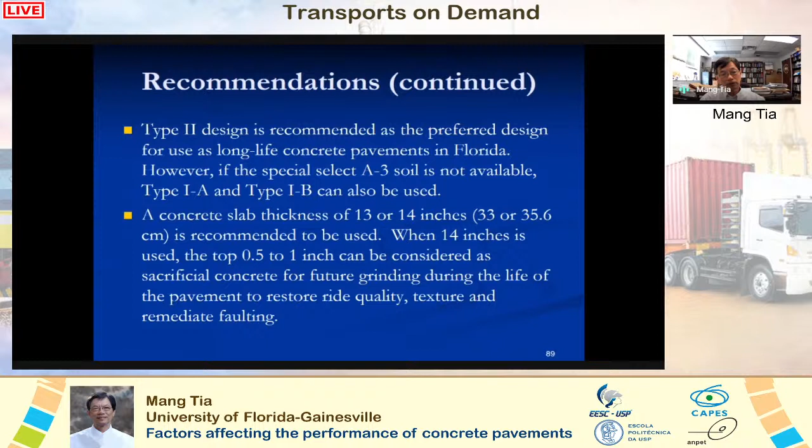If we use 14 inches, we have an extra either half an inch or 1 inch, which can be considered as sacrificial concrete for future grinding during the life of the pavement to restore its ride quality, texture, and remediate faulting. Okay, after many years, concrete pavement tends to have some faulting, and we can grind it and restore its rideability. With the extra half an inch or 1 inch, every time we can grind off a quarter inch, and we can do it about 2 to 4 times.

The present construction specification seems to be adequate. We just need to design the concrete mixtures accordingly. Okay, so 650 psi or 4.5 megapascals at 28 days seems to be a good flexural strength to use. The key thing here is to use an aggregate which will give us a low elastic modulus and low coefficient of thermal expansion. How do we know? Well, we can look at past records of test data. If not, we have to run some tests in the lab.

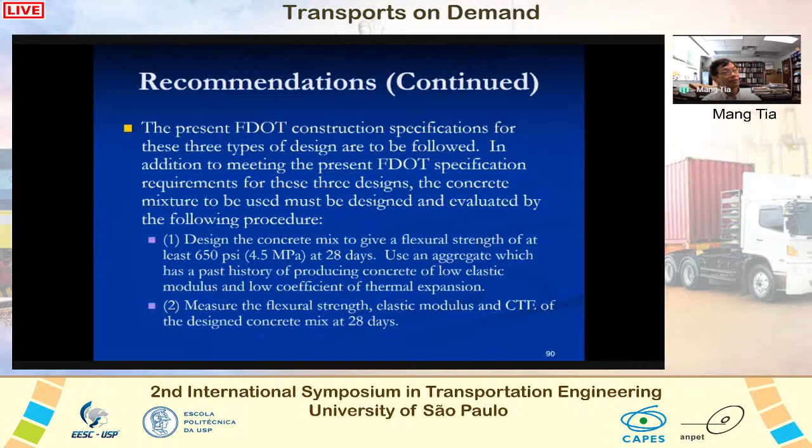So what are the key things we need to look at? We need to look at flexural strength, elastic modulus, and CTE, the coefficient of thermal expansion. And usually we measure that at 28 days. And how do we know that it's going to last for 50 years? We can run this MEPDG analysis. Now it's not called MEPDG anymore because in the past this software was free. Now it's no longer free. So it's called the AASHTOWare ME Design.

Okay, it's not free anymore. So if you want to get it, you have to pay a license fee. Okay, so if you have all the material data and the traffic, we can use this ME pavement design software to determine the expected life, and whether it has an expected life of at least 50 years, using the properties of the concrete. If the predicted life of the pavement is at least 50 years, the concrete mix would be acceptable for the project.

If the predicted life is less than 50 years, a new concrete mix can be designed by either specifying a higher flexural strength or using a different aggregate. And if possible, try to use an aggregate that would give us a lower coefficient of thermal expansion. And steps 1 through 3 would be repeated until an acceptable concrete mix for the project is obtained.

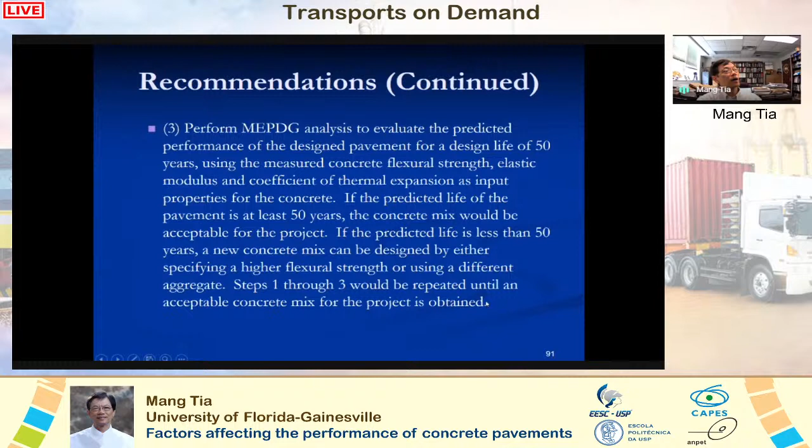And we also recommended that FDOT establish a database of concrete mix designs which are acceptable, so that you don't have to redesign the mix every time. We have a good database for use in long life concrete pavement, so that the optimum concrete mixes can be designed and selected efficiently for this purpose.

Okay, so that's it. So what is the message I am preaching? The message I'm preaching is that concrete pavement would perform better if the concrete uses the right kind of aggregate that would give you a low coefficient of thermal expansion and also a relatively low elastic modulus. And the second thing I'm preaching is that don't just try to increase the subgrade stiffness.

The subgrade stiffness is not going to help too much. You need some stiffness, but if you have problems, don't try to increase the subgrade stiffness. So the message is very simple, but we need to do it. We need, if you believe it, to apply it, and you see that it's going to work. Thank you very much. I can take questions now.

I can unshare now, I suppose, right? Okay, I'll stop presenting, and I'll see if there are any questions. Sorry, I didn't use 2 hours, but I thought if it's more than 1 hour and 10 minutes, people will lose interest.

Okay, it was really great. Thank you very much for your very broad presentation, addressing many factors that affect the concrete pavement performance. I'm sure that the audience, starting with me, enjoyed and learned a lot.

Oh, thank you. And as you mentioned, it will be also very nice to have you here in person. In March, our graduate program decided to have a partnership, and the partners would come to stay with us, lecturing and supervising. You are my partner, so this arrangement of doing things over the online seems to work fairly well. It saves a lot of time not having to fly over there, and the financial support to have you here. When the pandemic is over, we meet in person. As soon as possible after the pandemic, we will restart thinking about our partners, and I hope to have you as soon as possible. We have some questions.